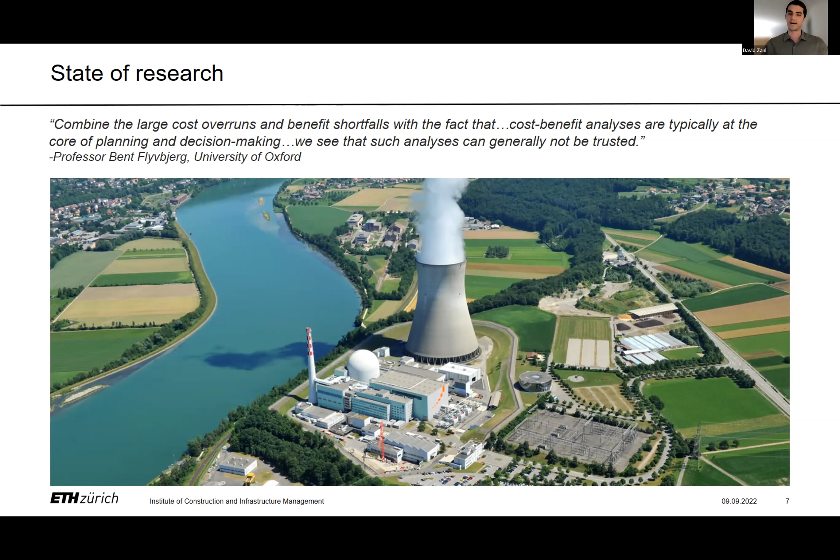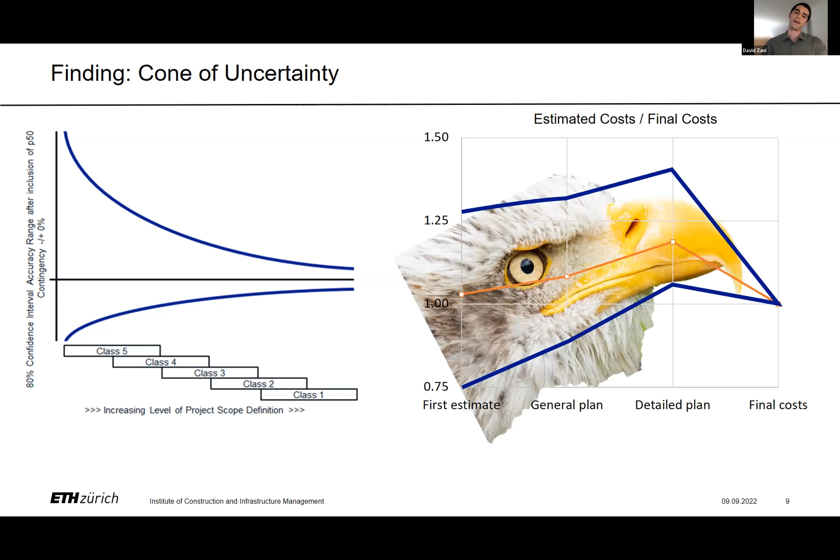So there's kind of this weird thing going on where we begin with a very realistic estimate, close to perfect, and then it deviates from the actual costs towards the later project phases. If we think about this 80% interval, the blue lines, we see that the interval is not really a cone that narrows as the project goes on. It's more like a beak or something. I'm still trying to find a good analogy, but the point is we don't see the theoretical behavior we would expect.

And this was interesting for us, so we talked to the project managers and went through the planning guidelines of this specific company. We found the following: the first estimate in this company is subject to external approval. There's an external body that green-lights the project based on the first estimate, so if they like the number, they give a go-ahead for the project.

Then the second estimate, the general outline of the project, is subject to external oversight—the external body needs to approve any deviations from the agreed-upon scope. But once we get to the detailed plan of the project, there's no more external oversight. It's just the internal company making changes, revisions, and change orders. And so we see again that costs tend to increase.

So for us this was very interesting. What does this mean? Why are we seeing this kind of evolution, and how does that impact project selection? What impact does this have on decisions made in the early stages, in the first estimates of the projects? Is there even a negative effect on project selection or on budget efficiencies for programs? These are the kinds of questions that come up when we see something like this.

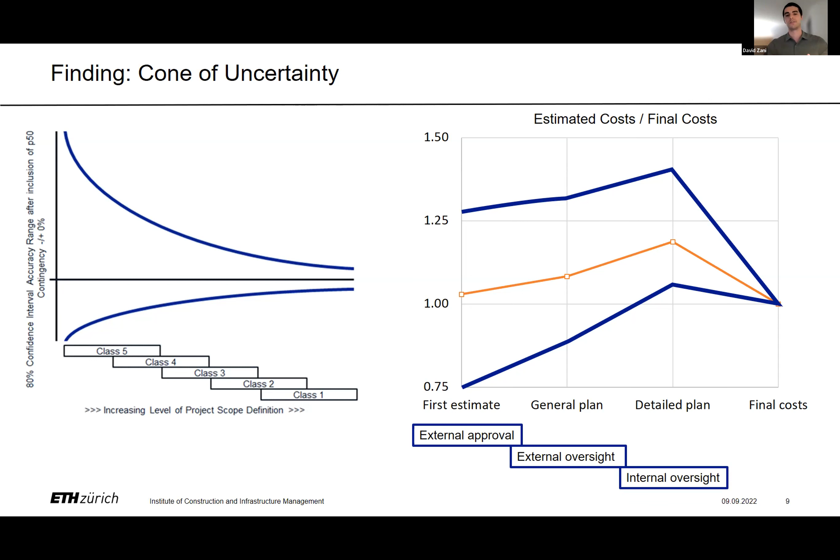So this was the first finding, that this cone of uncertainty doesn't really apply to some of these cases. Our second finding I've called unrealistic targets.

These target costs were the basis for the yearly budget of the company, their program of projects, their portfolio of projects. So when the target costs didn't match the estimated costs, they just told the project managers to decrease the cost estimates somehow. And what happened was that the new estimate from the project manager usually just had a flat rate decrease to fit within this box of the target.

You might see what's coming here, but what actually happened was that the final cost of the project went above the initial estimates, to on average an 18% cost overrun. And this happened in a majority of the projects.

So again we see this kind of weird behavior, where the actual early estimates are being influenced, in this case, by internal pressures. The question this brings to the table is: how do you improve your estimates or improve your decision-making if your own estimates are subject to internal pressures that may distort your actual project performance? This is a question that arises out of this finding about the unrealistic cost targets.

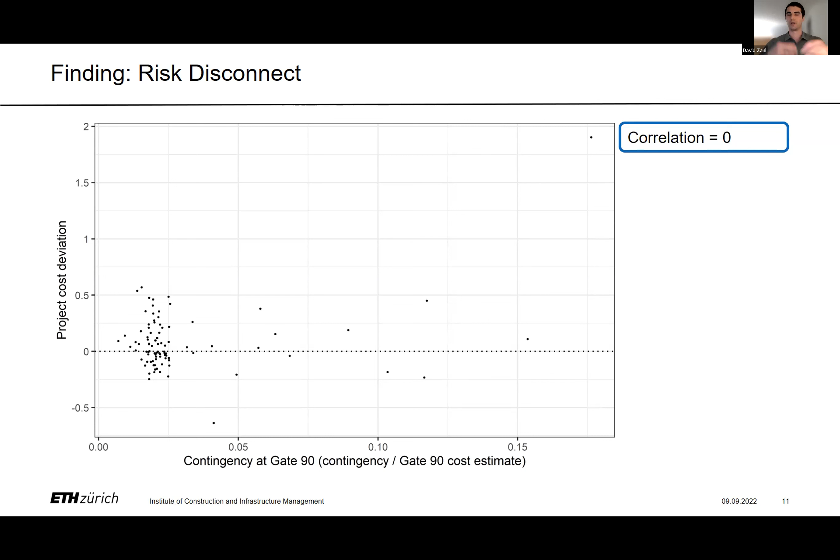What this shows us is that there's actually a disconnect between how risky we think the project is and how risky the project turns out to be. So we're not good at estimating risks, we're not good at understanding how uncertain our project is. This raises the question: how good are we in general at understanding a project and how its cost outturn will be? So this is the third finding, talking about the disconnect in the risk behavior of a project.

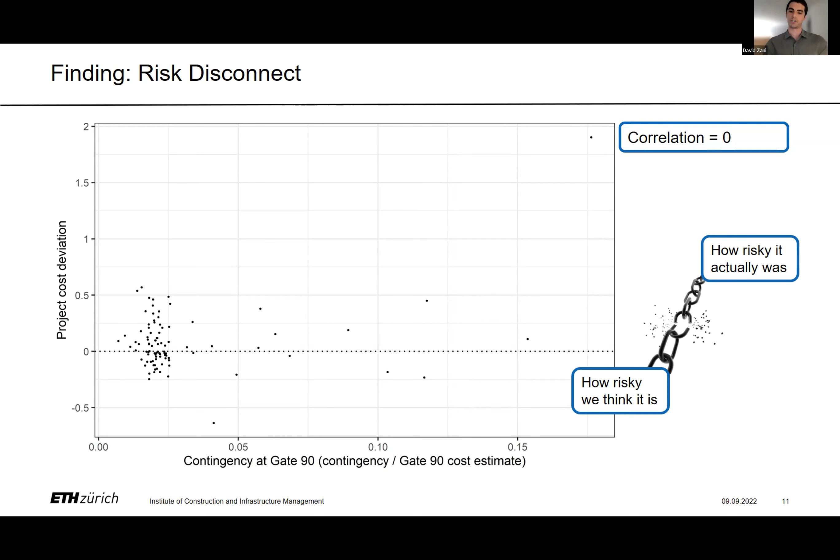So this is where we are today at the beginning of my PhD. We've seen some of these things from our first analyses. We saw the cone of uncertainty being more like a beak, not really following that theory. We've seen the unrealistic target costs that apply internal pressures on costs. And we saw a disconnect between the perceived risk of a project and the actual risk of a project in the end.

But why do these things matter? Why are they interesting to us? Well, really simply, we want to make good decisions. As infrastructure managers, as investors in infrastructure, we want to make good decisions. If we think back to the Sydney Opera House, if the real cost had been known at the beginning, would the opera have been built? Was it the right decision to build it, knowing what we know now? Or was the critique of the project justified? Was it successful? Was it a failure?

The important thing is that we need to have the data to confirm our decisions. We need to be able to look back and think about what the analysis showed us, what decision was made, and whether or not the decision was correct based on the analysis. But this is very difficult to do, especially in cases where the data is not around. So we need to find a way to use the data - to collect it, organize it, analyze it, and then use it in a way that is efficient and pragmatic for project managers and planners.

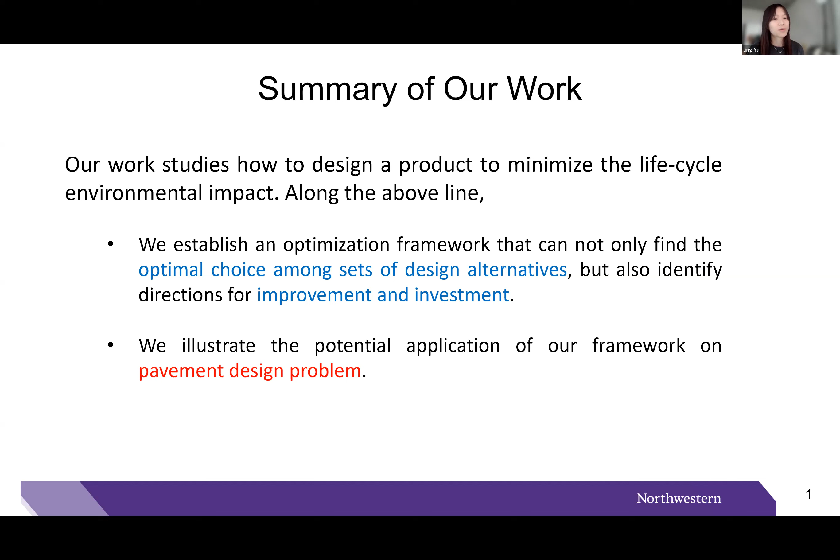This is the example I'll introduce later. As you can see, we have a lot of alternative materials here, and if we made a comparison one by one, there would be 36 trees instead of one big tree as a whole.

Now let me review some background of the input-output analysis. I'll take the structure of a concrete road as an example. The number here represents the quantity needed to satisfy the upper level's demand.

We can capture this structure within a matrix called the bill of material matrix. The columns of this matrix represent the requirements of other materials to produce one unit of each product. We denote Y as the final demand and X as the gross requirements of each product, each material. We can capture the relationship between X and Y by adding up all the gross requirements at each level of the tree. These equations also have a matrix form expression, using the bill of materials matrix.

If we expand from simple sectors to economic sectors, this basically follows the idea of input-output analysis to capture the interrelationship of those economic sectors.

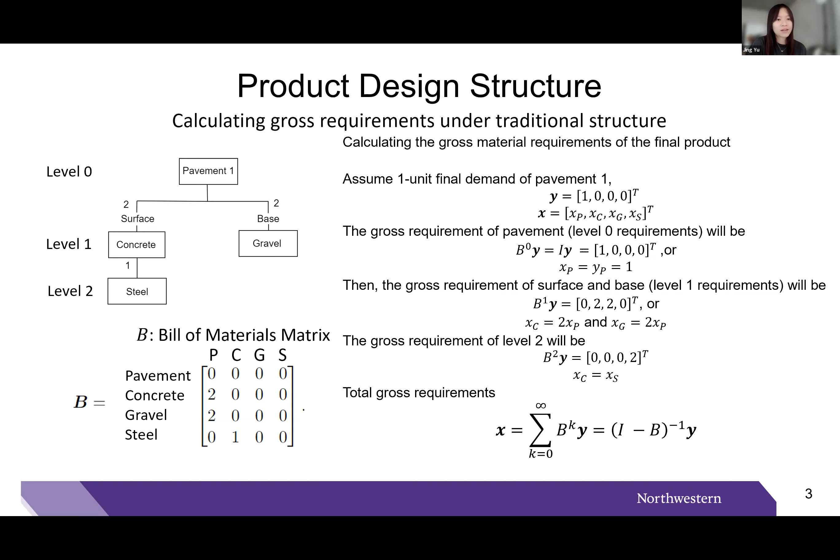Now it's natural to ask, how can we capture the substitution relationship in our product design structure? And is it still possible to have that matrix form expression of X and Y?

So this is our structure with the existence of alternatives. We can write down all the quantitative relationships of materials. Note that the dashed line box indicates the alternative set here, and the demand could be satisfied by any of the included materials. As you can see, the demand of pavement can be satisfied by either 3 units of asphalt or 2 units of concrete, and it doesn't have to be just one of them chosen. In some cases, the demand of pavement can be satisfied by those 2 materials together, so we add them up to get the demand of pavement. This is the quantitative relationship.

Can we still have that matrix form expression under our structure? The answer is yes. We just need to make a slight adjustment of the identity matrix and the bill of material matrix here. Under this adjustment for the alternative sets, we will still have a nice matrix form expression of the final demand and the gross requirements.

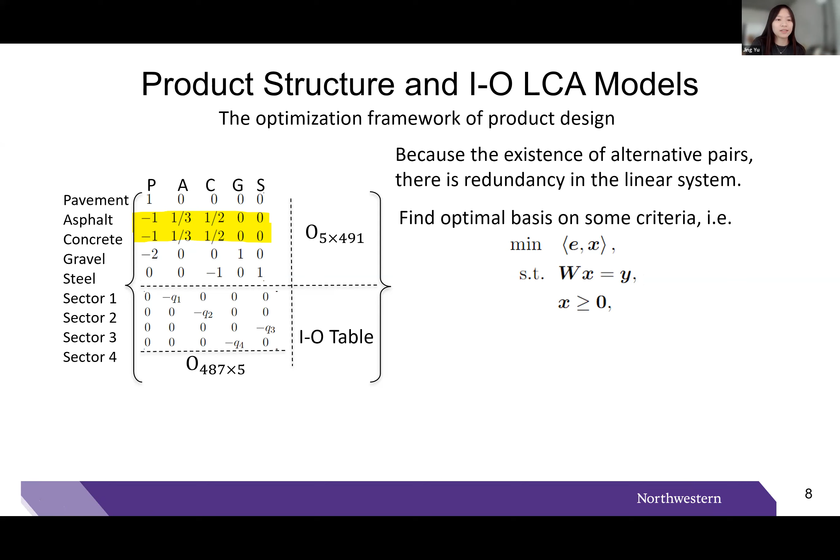So let me introduce the examples that we have here. We basically have two different kinds of pavement structure: one with an asphalt surface, another with a concrete surface, and we have several alternative materials for each layer of the road.

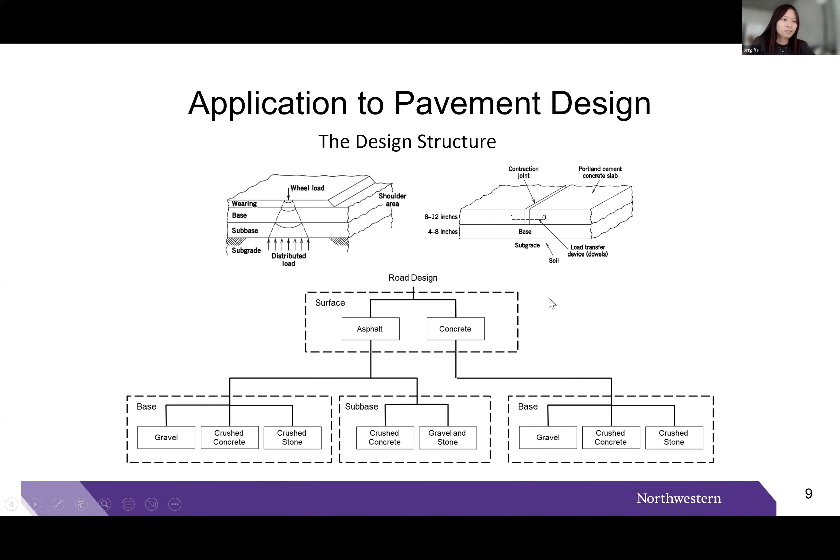We also make some assumptions about the thickness of the road, and also some maintenance phase assumptions of the road, because if we need to make a fair comparison between asphalt and concrete, we need to account for the fact that they have different durations and different life services. We made some assumptions about that.

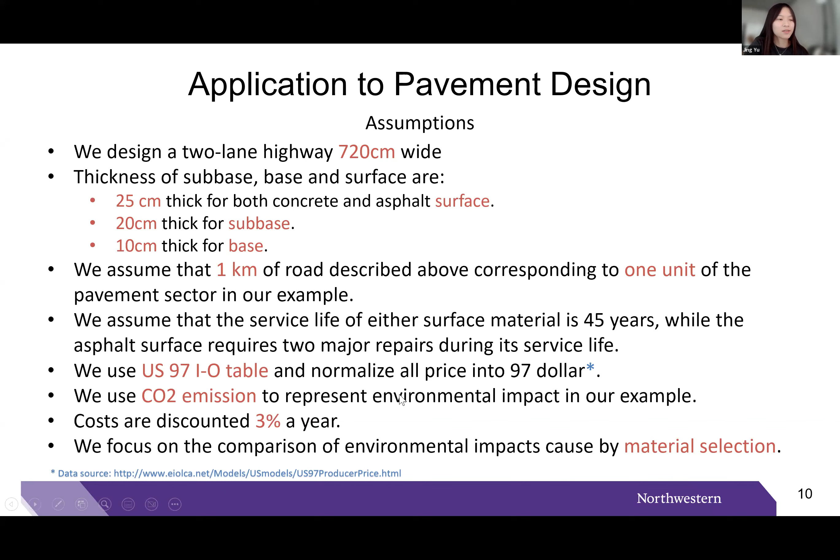Here is the formulation of our problem. This is quite simple, and our goal is to minimize the total CO2 emissions with the constraints of input-output constraints and non-negativity constraints. By solving this problem, we will get certain numbers of the gross requirements, and I will show you the results.

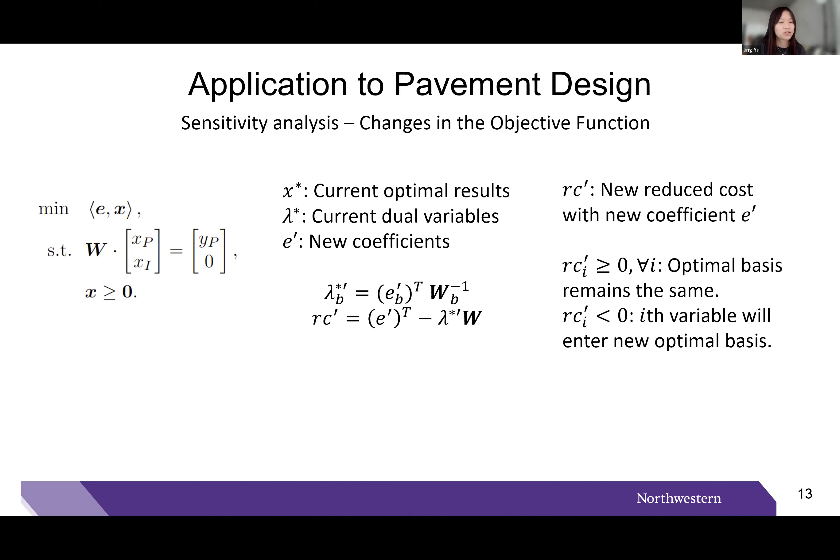This is an example of the sensitivity analysis results. Considering a case when someone says, oh, we are not minimizing the total CO2 emissions anymore, I'm more interested in minimizing the electricity use or water usage instead of CO2 emissions.

We don't actually need to solve the whole problem again. The only thing we need to do is calculate the new reduced cost and see if it is greater than 0 or less than 0. As you can see, in some criteria, for example minimizing electricity usage, all the new reduced costs are greater than 0, which means the optimal choice still remains the same.

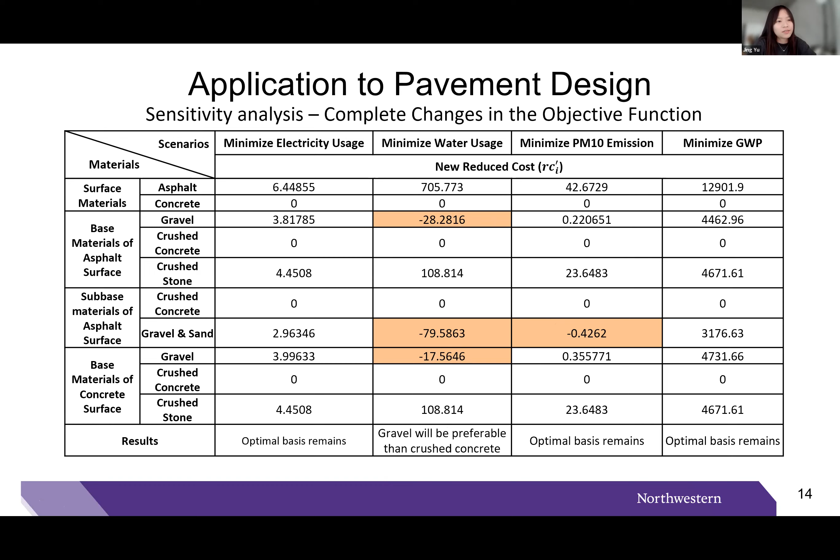While for some criteria the reduced cost is less than 0, this indicates that some of the materials will be the better choice than the other one. So this is the first case of the sensitivity analysis, and we also have some other interesting findings about the sensitivity analysis.

Imagine that if there are some new technologies that can reduce the CO2 emissions of certain activities, which kind of activities would benefit our choice? So we decrease CO2 emissions by 50% for one of the IO sectors, to simulate that the emissions of that certain activity could be decreased when some technology is developed, while others remain the same.

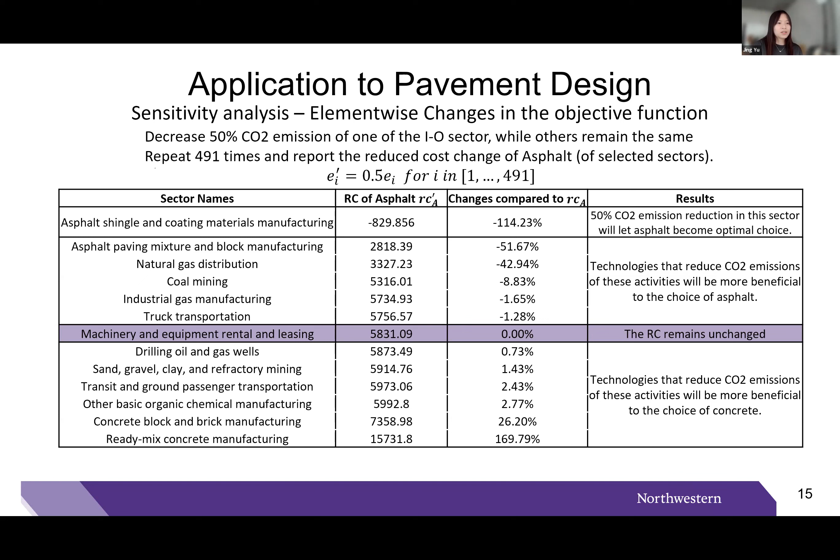To make a conclusion of our framework, there are some strengths: this framework can capture multiple sets of design parameters, and it can be efficiently solved by a linear programming system. And it returns closed form sensitivity analysis results, which could provide us many insights for further improvements. That's all of my presentation. Thank you so much, and I'm happy to answer questions.

Insightful work, and I guess all of the results that you have are, I think, very exciting. So are there any questions that we have for Jing? Yeah, Aditya, please.

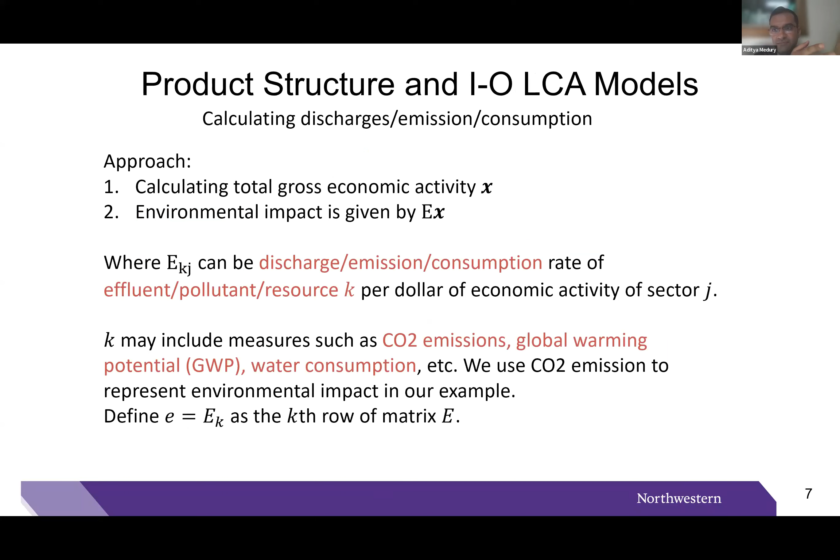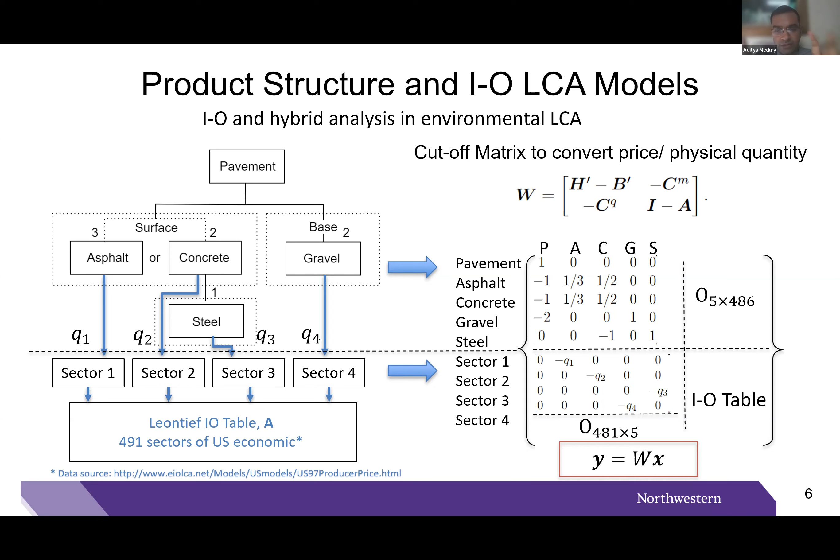Thanks, Jing, for the presentation. That was very interesting. One question I had, just for clarification, regarding the gamut of possibilities of solutions that the linear program might generate: in this kind of structure, the way you showed the tree, I guess the setup is such that you expect the design to either be asphalt or concrete, right? So you don't want a situation where it gives you a mix of this and that, which has a binary aspect to it, either one or the other. I was wondering if you can comment on how the structure of the linear program ensures that the optimal solution never gives a mix of both designs. I'm thinking of total unimodularity or those kinds of situations, whether that happens in this case or not. If you could comment on that, that would be useful.

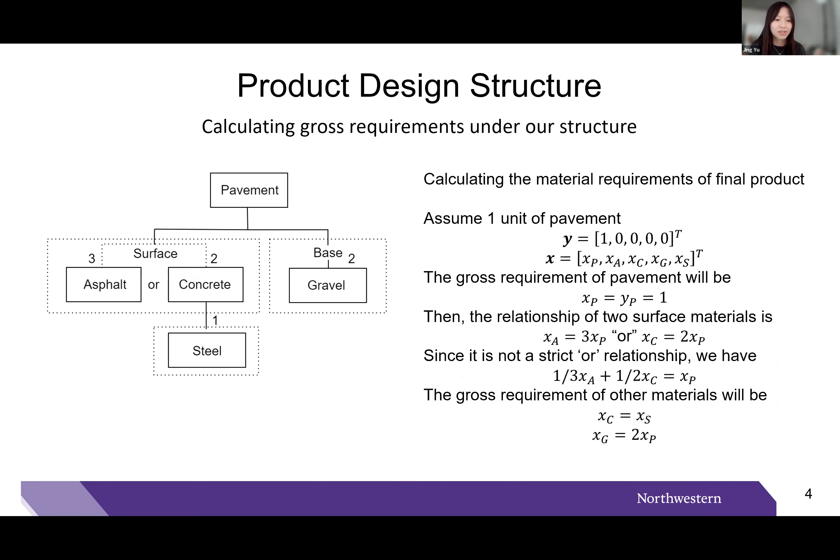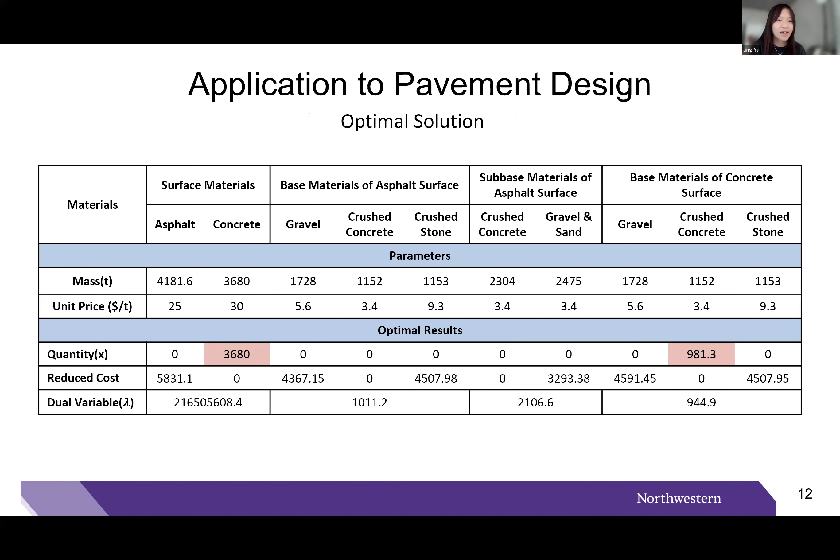Oh, thanks. So actually, I think the mix of asphalt and concrete is allowed in this framework. And usually the optimal result will give us just one of them, unless we have some very tight constraints, because as you can see here, the only constraint that I have is to satisfy the demand. And this will usually give us just one choice of the two alternatives.

The situation you mentioned, the mixture of the two materials, could happen if I add more constraints. For example, if I add a constraint about the budget, and if I tighten that budget constraint, it might lead to some cases when one of the choices cannot meet the budget constraint, and we need to add another kind of material to make the whole budget cheaper. I think this kind of situation is allowed in our framework. I see, okay, thank you.